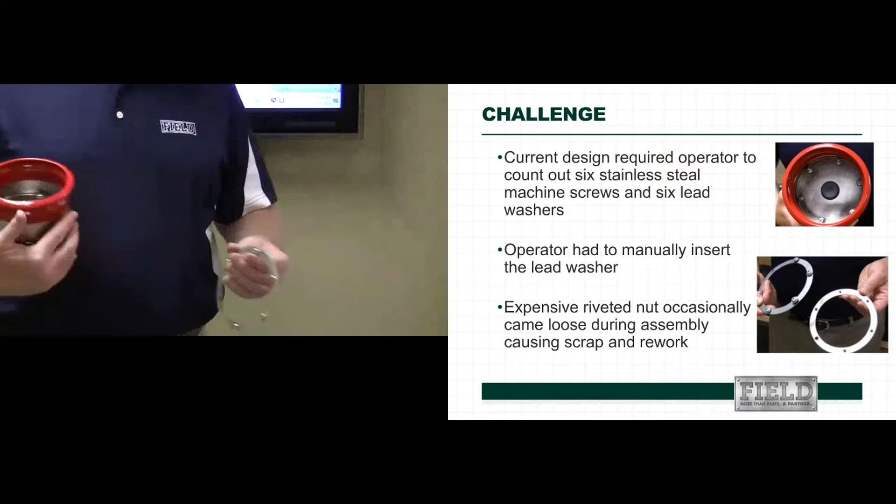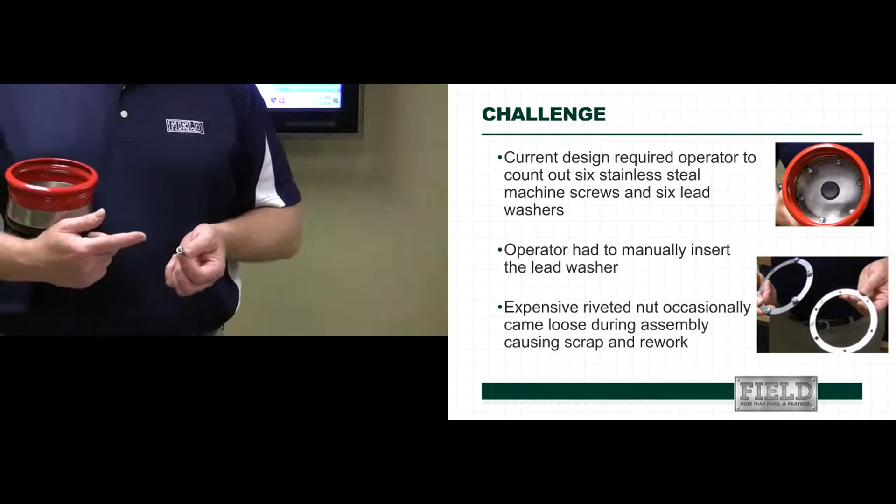It's a stamping that has a riv nut installed into it. There were some issues the customer was having with the assembly of those, generating a little bit of scrap. The fastener system being utilized was a cross-recess truss head into a lead washer.

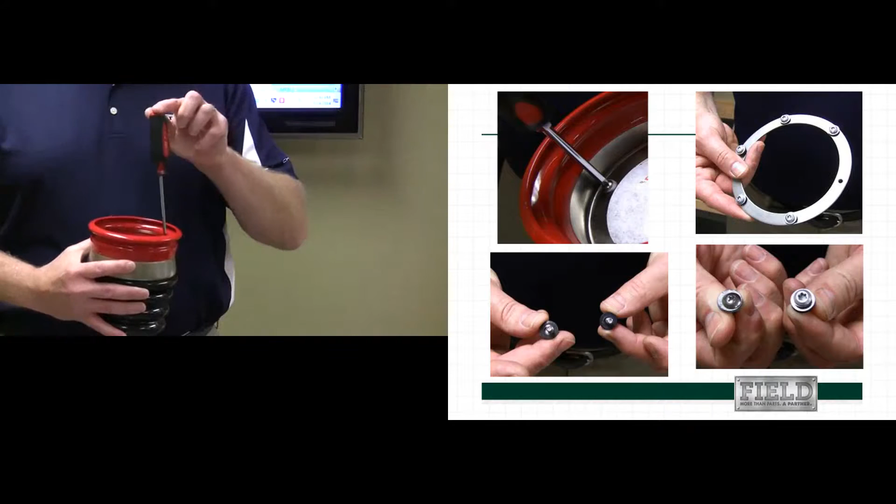One of the additional issues we saw was that when applying torque into the fastener, the amount of articulation required by the current system impacted the consistency of the joint.

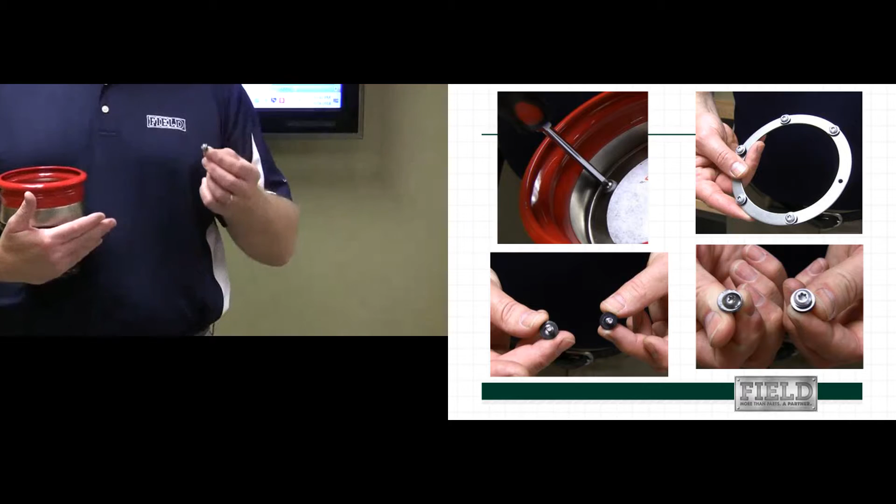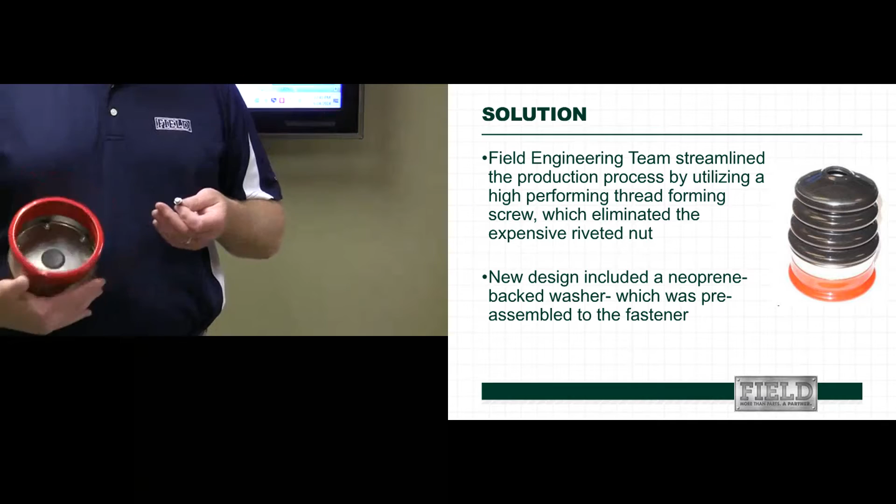The solution we engaged in was as follows: we modified the system to utilize a screw and washer assembly. There is a neoprene-backed washer pre-assembled to a screw with a modified recess to a Torx recess, so that when transmitting torque, it was done more consistently.

We also modified the stamping so that it only had a hole in it, and we used a thread rolling screw to form its own threads.

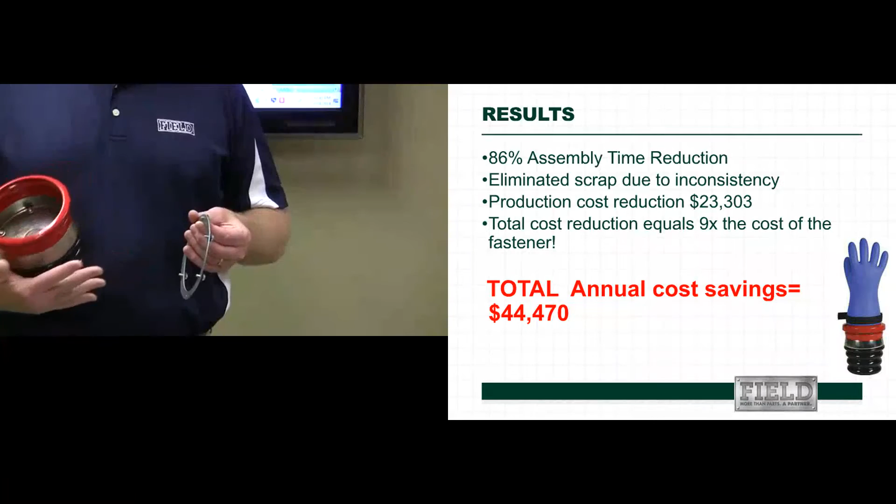The solution was as follows: we saved 9 times the cost of the fastener in the process as a whole. We reduced the assembly time being used by 86%. We also increased operator safety, ergonomics, and the flow of the system and how the device worked.

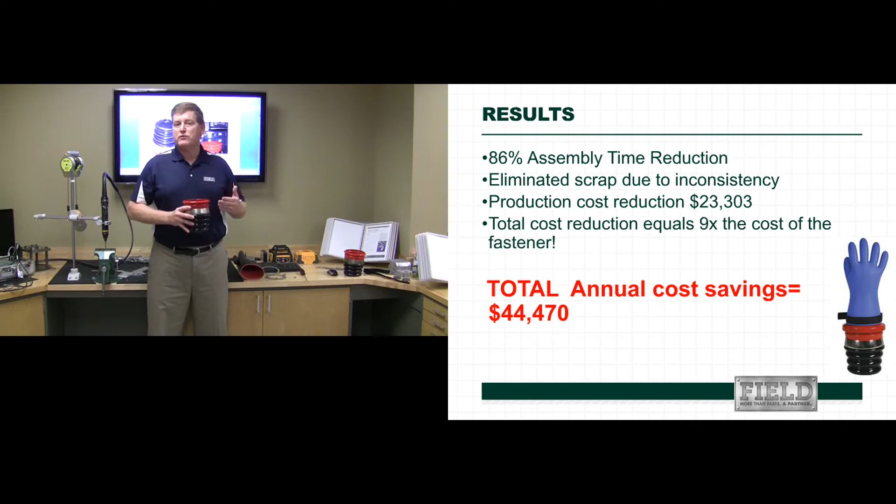We did actual benchmark testing of the current design and improved the amount of breakaway torque by 7 times over what it was, yielding a more reliable and consistent device.